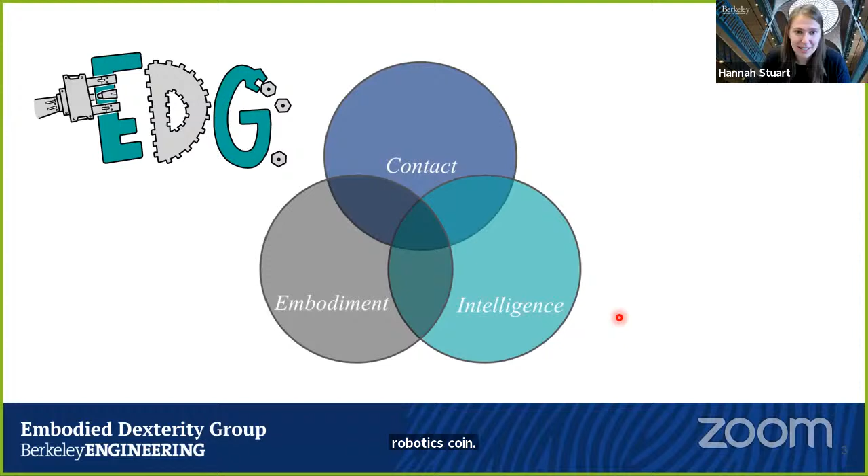Now, as you heard, I did my training with Professor Mark Cutkosky, and this is one of my favorite quotes that just really encapsulates the importance of this intersection: like the performance of a sports car, which is ultimately limited by the tires on its wheels, the performance of a robotic hand is limited by the skin on its fingers. This is just such an important element, and as you can see here, my expertise is in the design and understanding of robotic hands.

And so here we're going to add a little bit more resolution in this space. When I'm thinking about designing and prototyping systems for field deployment, a lot of times there's real utility in adding compliant elements, maybe under actuation. And that's going to also be a common theme that comes up.

Well, one element of the design of compliant hands is the compliance itself, or the kinematics of how it's going to interact with objects. On the left-hand side, you're going to see two identical hands, except that the compliance of the different joints is mixed up.

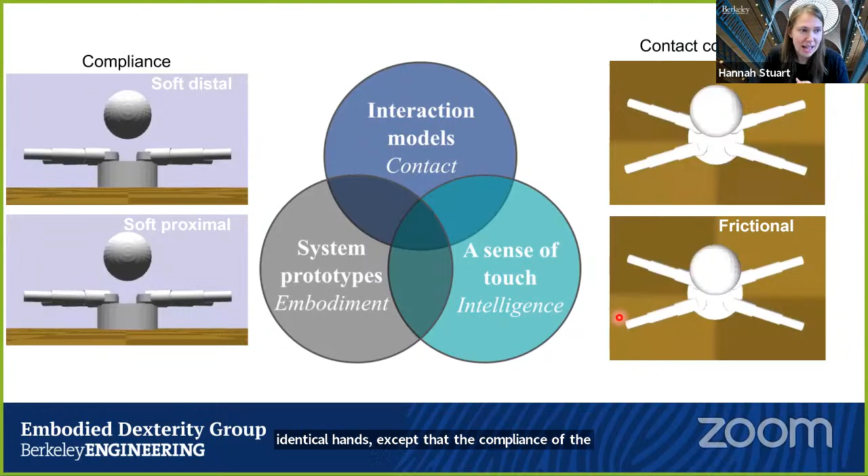This is a really mature field of studying how we design these compliant and under-actuated systems to get different motion behaviors and different forces as we interact with different objects. That's a relatively rich field already.

As I move forward, I'm actually much more interested in how our contact conditions are going to influence our behavior. In this toy problem, we have identical hands, but this time with different friction coefficients with that object. Very small changes in contact conditions, nothing geometric here, purely frictional, and this can make the difference between success and failure. So that really motivates the basis of our work.

I like to think of this not only as a challenge, but a great opportunity. A lot of times what we're trying to do in the lab is flip this around and say, if we have mechanisms that change our contact conditions just a little bit, we could have a really big impact on our overall behavior. So I see this as a cool design challenge as well.

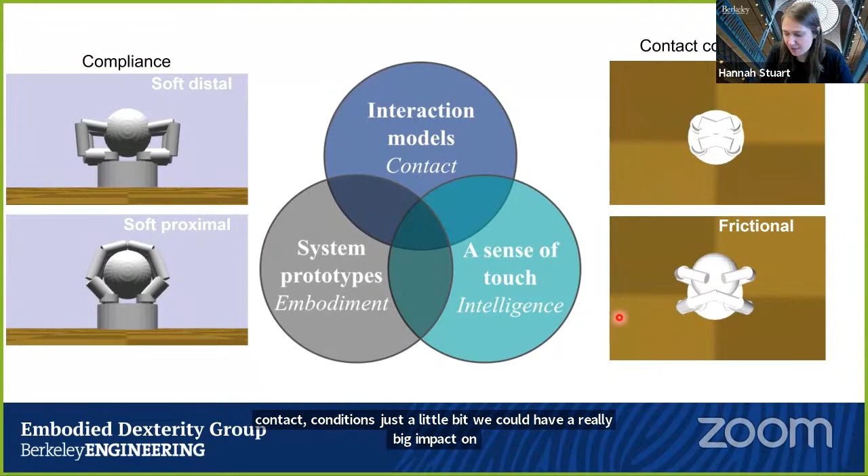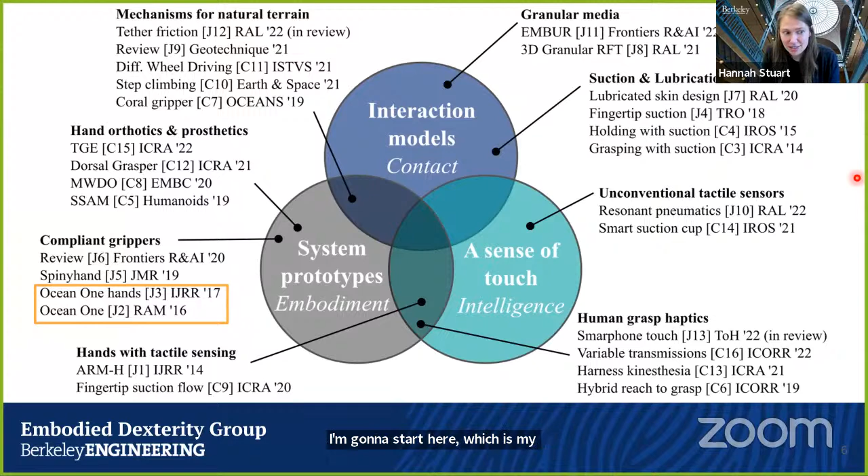I'm only going to be able to focus on a small subset of work, and here's a diagram showing the different applications we're working on. I'm going to start with my thesis work on the design of the hands for Ocean One, the deep sea diving robot, which motivates us to think about what contact conditions look like underwater—lubrication, or how we manipulate contact condition with suction. Then we'll think about how we might harness these ideas to sense our contact conditions through tactile sensors, still using ideas of flow and suction. Then we'll take a break from underwater environments, since not everybody works on underwater robots, and think about terrains in air, like granular media and other terrains on land.

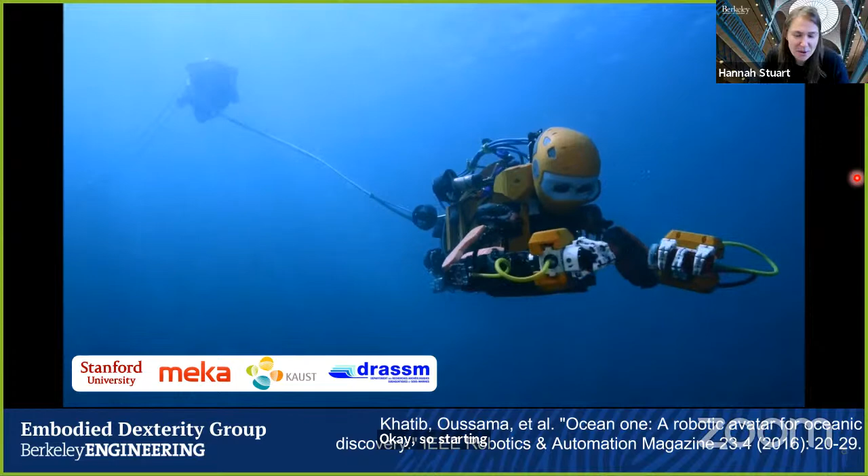Starting out, here is Ocean One, coming down at the ocean, where we actually got to take this to the Mediterranean. This was a really large team of researchers working on this, done at Stanford University, directed by Professor Oussama Khatib.

My job was to build those hands. So the part after the orange, at the very end, that's the part I designed and built. The really cool thing is we were able to go to the Mediterranean and actually go down to a shipwreck to test this on a more realistic archaeological application.

Here you can see them teleoperating it, and we were able to actually grab a vase. This was a shipwreck from 1664, I believe, so it had been a very long time since it had been touched.

A lot of the work for this was to essentially ensure the hands would not fail during operation. I remember early on in the project, Oussama said, you're building the hands—if the hands break, we can't grab anything, we're going to be very limited in the manipulation we can do. So resilience was really critical, and that became a central theme in my thesis.

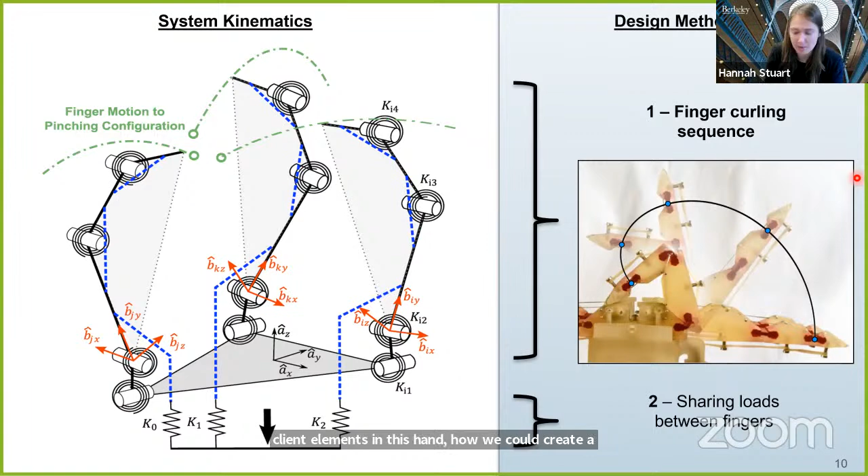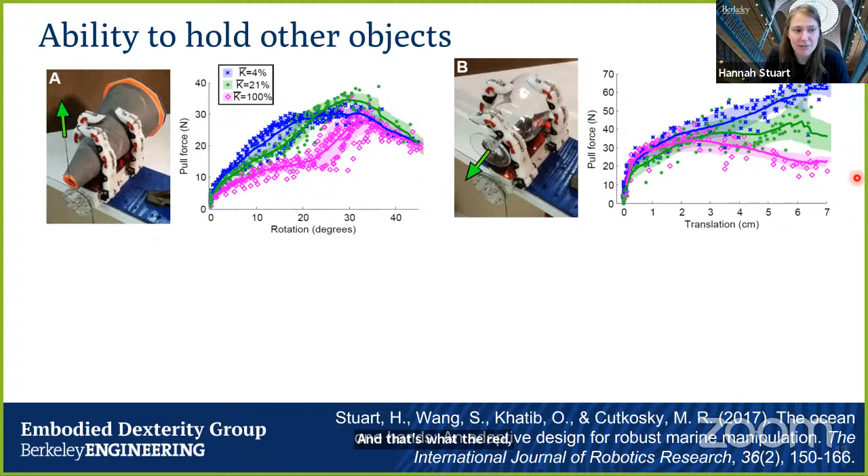I focused a lot of effort on the compliant elements in this hand, how we could create a very simple gripper, a one-actuator gripper that could do a variety of different behaviors. I won't spend much time on this because I want to get to the contact conditions, but the main punchline is that we can essentially change the different compliant elements—shown here in blue, pink, and green—with different benefits. You essentially want to dramatically change the stiffness of your device using clever spring mechanisms loaded in different ways.

If you're interested in the compliance, contact, and kinematics of this, please check out the paper. We've actually published an open source version of this hand design, and I highly recommend it if you're interested in prototyping—it's pretty easy to make and relatively inexpensive for a robot hand.

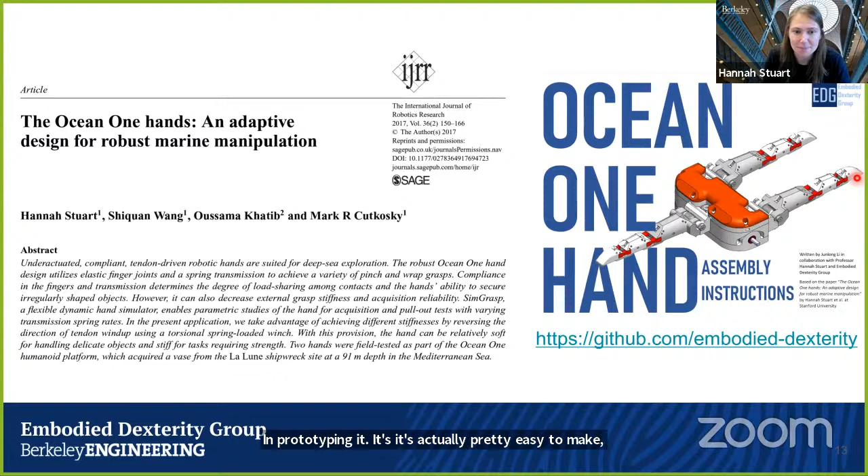But resilience and waterproofing is not the only impact of being underwater. Even the robot arms we used were based on a design for operation in air that had been modified, waterproofed, and filled with oil in order to work underwater.

One of the really important questions I wanted to ask as a student was, are there other impacts of being underwater? What I came upon was that you're in this denser, more viscous fluid, and you also have slippery films. These things are physically unique compared to being in air. So how should we design our system differently?

In terms of grasping, you might think, are there any underwater graspers? I'd say the jaws and mouth of a fish are an incredible grasper. You can see a larger fish pulling in its prey simply by opening its jaws and rapidly sucking in water. This is a principle that developed underwater uniquely.

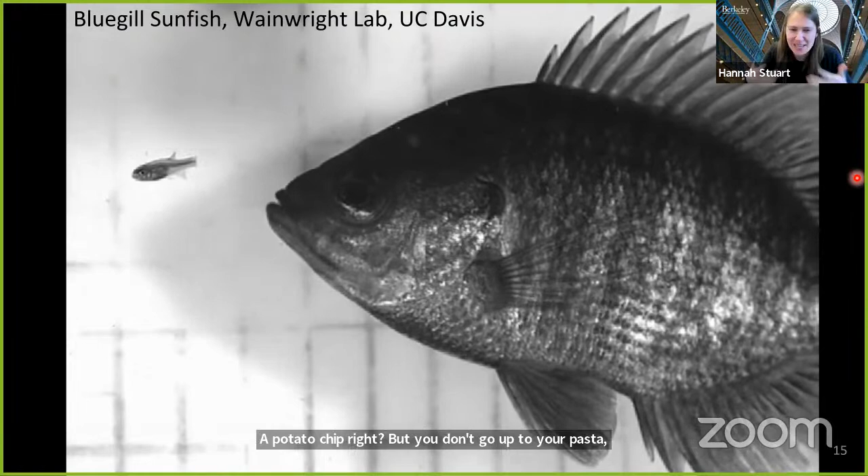I think there are a couple of animals that evolved something like this on land, like an elephant that has huge lungs and might be able to suck in a potato chip. But you don't go up to your pasta and just suck and hope it goes into your mouth—you use a fork, you use physical contact. So suction flow feeding is ubiquitous underwater, and it makes so much sense.

So why don't we add this to a robot hand? We went ahead and did this. You can see loops of tubing off to the left—it's not integrated very elegantly, but this was an early concept. The scale of forces is on the order of a little more than 1 Newton for the pumps we selected, and these are small pumps. The distance at which you start to feel those forces is on the order of a couple millimeters. So this is really, really small.

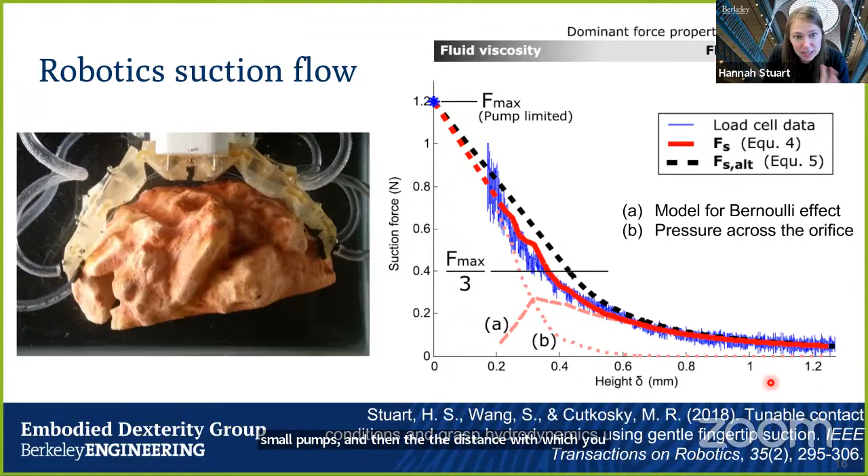Here's the effect, similar to that fish sucking in its prey. This is actually the first take—I just tossed in a little Lego block and it went straight to the fingertips. This is a much easier task to perform than trying to fish around with your fingers and grab it. So the question is, what about bigger or more massive objects?

What are the limits to this, and how much suction flow do you need? This comes down to concepts of water drag and inertia. Here's a larger object, an order of magnitude more massive. You can see that without suction, we have no hope of grasping it, but with suction, we do.

We want to understand how variable this is and how much impact it has. Here's the overall setup of the robot hand on the bottom facing upward, and the yellow star is that video I just showed you. This shows the region in which we can successfully grasp an object. The purpose of this grasp region analysis is to say: if I'm floating around, how off can I be? How accurate does my arm need to be to secure a grasp?

The dots are the experiments and the lines are simulations. You can see that when we go from no suction to with suction, we get about a 30-some percent increase in our grasp region. And it's most helpful when an object is right near the boundary of whether we can grasp it or not.

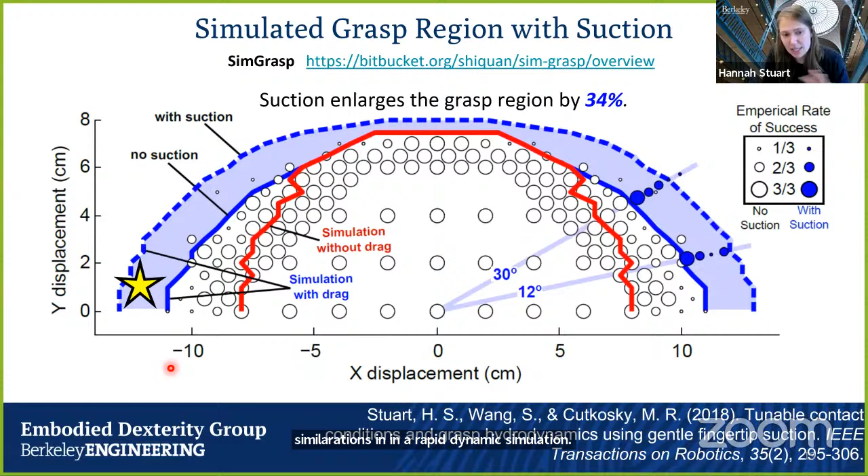Now this is a really useful tool to be able to run these simulations in a rapid dynamic simulation. We use the package SimGrasp, using a simplified model for suction force. The great thing about validating the utility of this is now we can vary the task. It was quite labor intensive to collect that initial set of data.

We can also look at, across object mass, how much suction do we need? What pumps do we need? And get the most utility from changing or improving our suction in this middle mass region. So that concludes the idea of adding suction to manipulate our contact conditions for this dynamic grasping of a floating object.

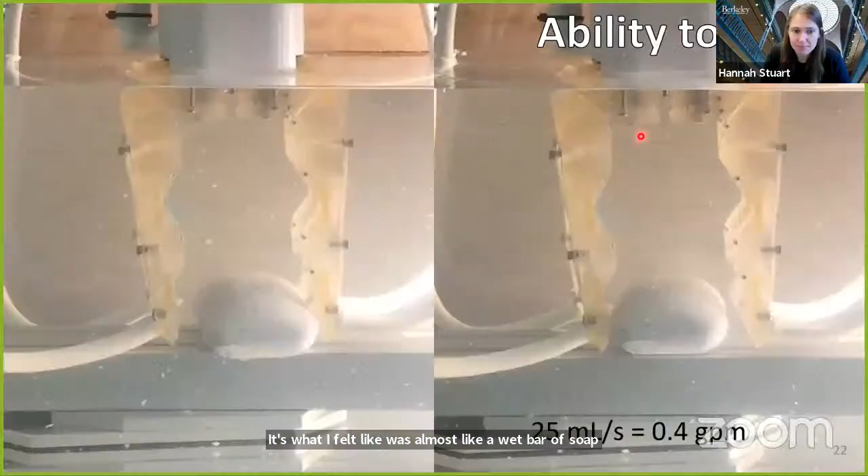But the object that we acquired from the shipwreck was extremely slippery. It felt almost like a wet bar of soap. It was covered in this thick biofilm. And so we wanted to be able to test this on slippery objects as well. So here's a bar of soap.

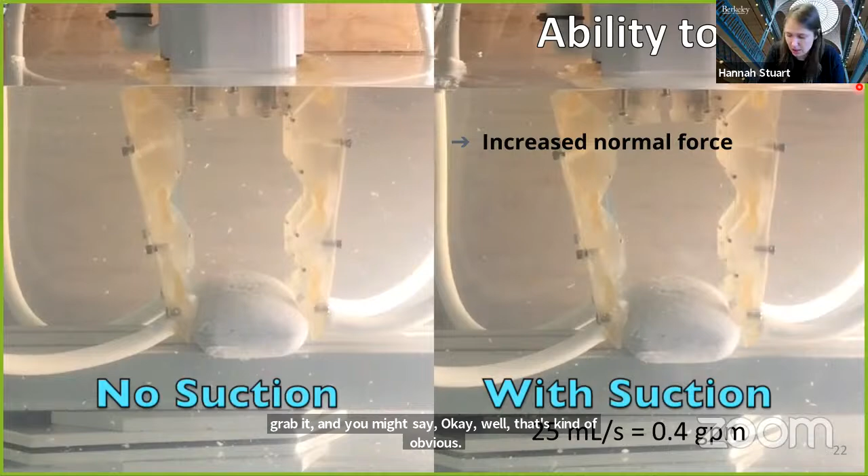And with suction, we can grab it. You might say, okay, that's kind of obvious, you're increasing your normal force by sucking or pulling on this surface. But in fact, we're not getting a seal, and we found that we're also getting an increase in our coefficient of friction, especially on rough surfaces.

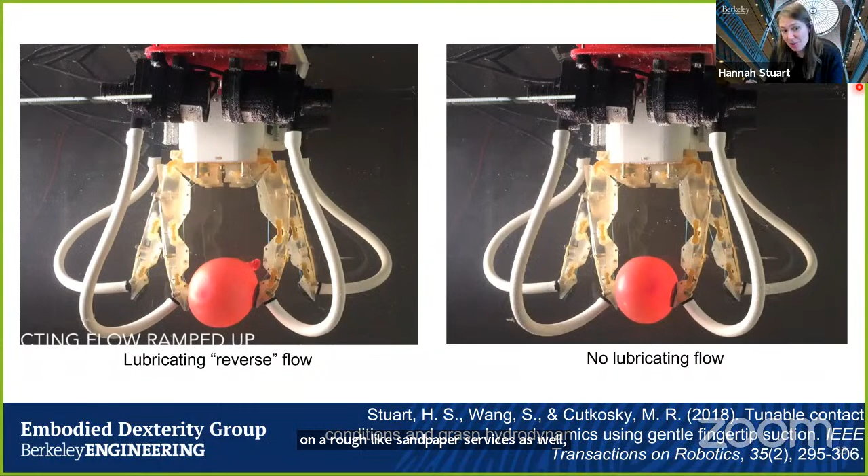So you're essentially pulling the water through that interface, and that gives you a nice suction feel on rough, sandpaper surfaces as well. Then we can reduce our friction by pumping water in the opposite direction. This gives us a range of very interesting push and pull right at the fingertip underwater.

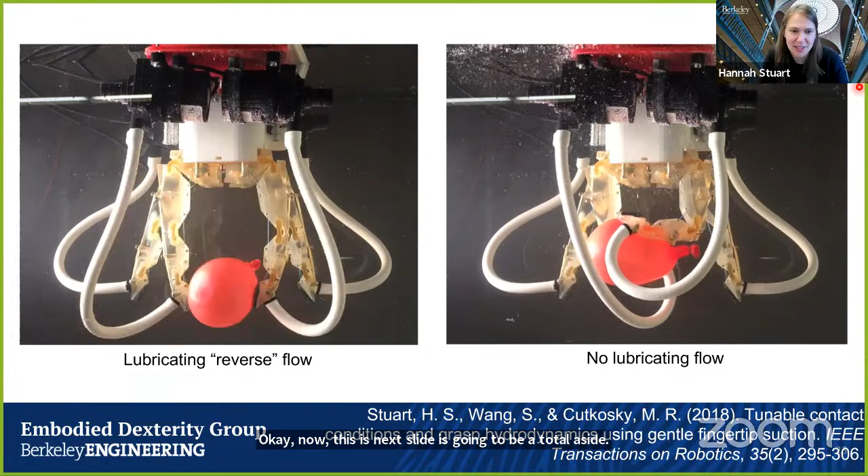Now this next slide is going to be a total aside, but I know there are folks at Toronto interested in underwater systems. This work is under review and in preparation, but I wanted to mention that we are now interested in how smaller scale systems can do manipulation. So thinking about that fish again, what kind of jaw allows you to grip onto surfaces? We're doing these studies in fish as well as in robotic systems.

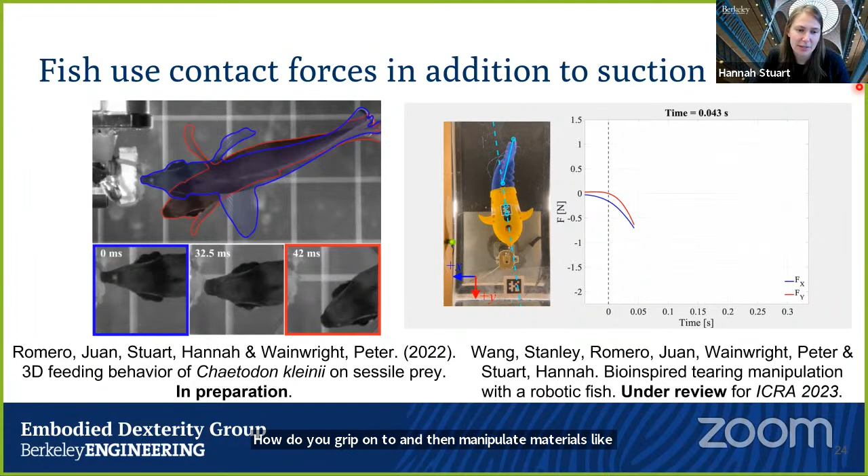How do you grip onto and then manipulate materials, like tearing something off of a substrate with a robotic fish? Okay, so that pretty much covers the compliant and contact condition elements we've been interested in for these underwater environments. Now I want to move on to some of the other elements of this second region, which is on the lubricated skin.

Some folks have said suction seems very helpful in a specific scenario, where maybe you have the ability to carry around pumps and add in this tubing, but it may not be practical in other environments. One really important one is when you're not totally submerged, going in and out from a wet scenario, the pumping becomes much more complicated as you start pulling in both water and air.

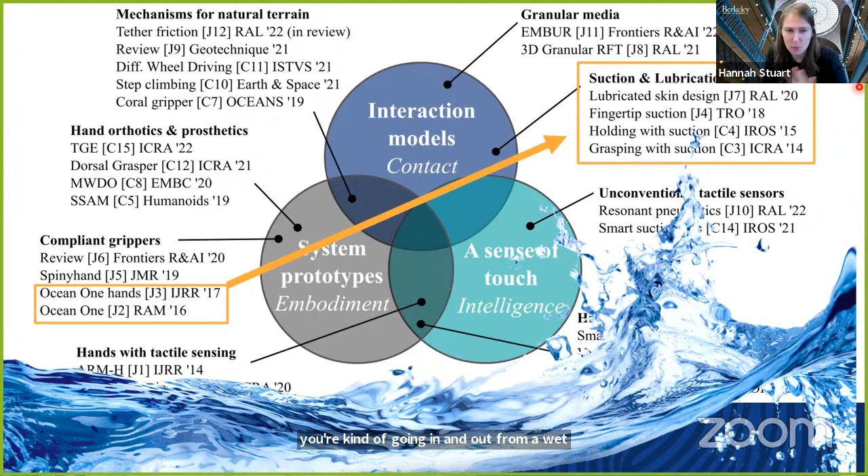If we can move away from an active system to a more passive system, I think this could be broadly adoptable. So here we're backing up and asking, what's the simplest technology we could think of? Well, it's a rubber skin. The vast majority of robot hands have some sort of rubbery frictional skin surface, but what is the geometry of that skin? When humans interact with objects underwater for a long time, our fingers get wrinkly.

Now, I would say this is still out for debate. Some people have found evidence that the wrinkles have some mechanical advantage, some sort of frictional element, but others have found the opposite, that actually the wrinkles can reduce friction. So from the biological perspective, I would say it's not yet concluded.

But what we can do is answer this from the robot side by parametrically studying different skin geometries. So that's what we did. You can see here that we tested a number of features, keeping the nominal contact area the same, but moving from one feature to three features to many, many features, testing each one individually.

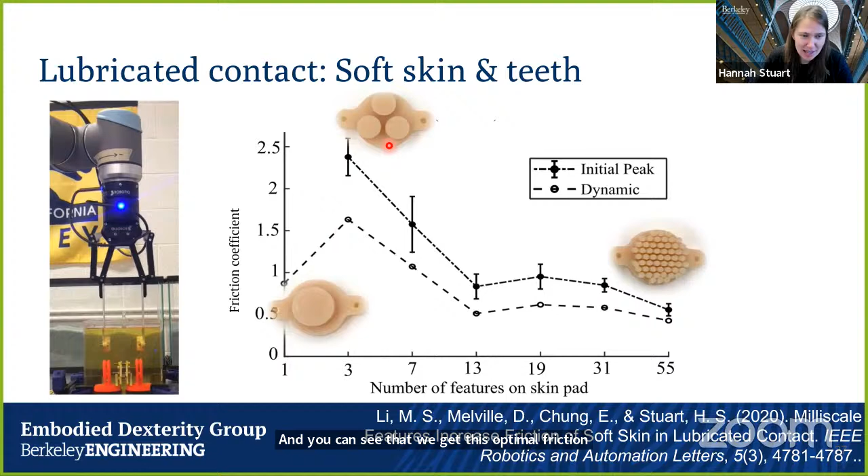Here we're increasing the lubrication by testing an oil and then vertically pulling upward and measuring the friction coefficient. You can see the dynamic friction coefficient and the initial peak. We didn't report initial peak for one feature because it's so slippery that we don't even measure one. And you can see that we get this optimal friction property at 3 contacts. Okay, what's going on there?

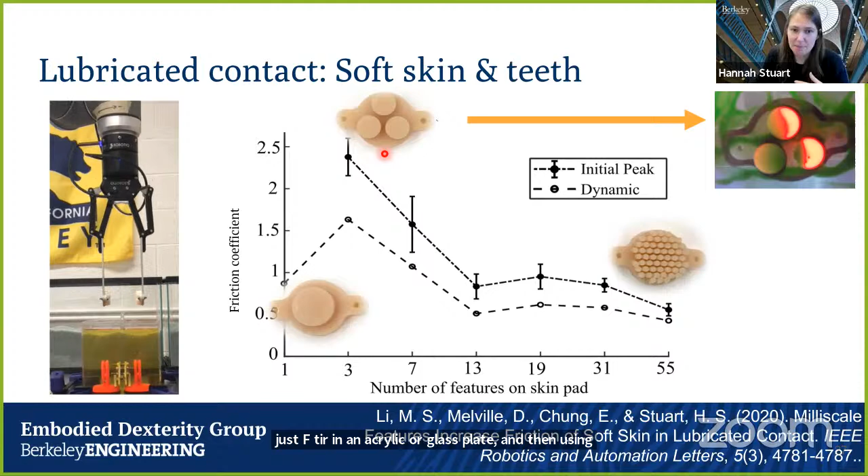So to really understand how this lubricating film is affecting contact, we came up with a new way to visualize it, which is essentially FTIR in an acrylic or glass plate, using a dyed oil on top, which allows you to visualize not only the contact region, but also the thickness of the film. This is how it operates. The important part about using this oil rather than water, which wouldn't work, is that it has a very similar index of refraction to the material it's sitting on.

And so you can see here that as we visualize dry contact, 1 versus 3 features, they're very, very similar. In fact, 1 feature is going to be stickier. It's going to be better. It's going to be a little bit more catastrophic when it starts to slip.

But 1 is typically better. Then when we go into this wet circumstance, 1 is basically slipping off on its own, but then 3 is giving us that nice stick-slip behavior that we would expect in dry conditions.

Okay, so that's as far as we took it. I think when we're thinking of underwater environments, especially in the field, there's maybe a combination of spines. Spines are a very common area of research, and we've also been interested in this for very rocky surfaces. I think this is a growing and interesting area of research for us. I will say this is work that we did before the pandemic and got put on hold during the pandemic, but I'm hoping we can continue it as we move forward.

Okay, so we've gone pretty deep into compliance and contact conditions for underwater multi-finger hands. So the next thing I want to do is to bring in the sense of touch, and then we're going to go out of the water. Okay, so sense of touch.

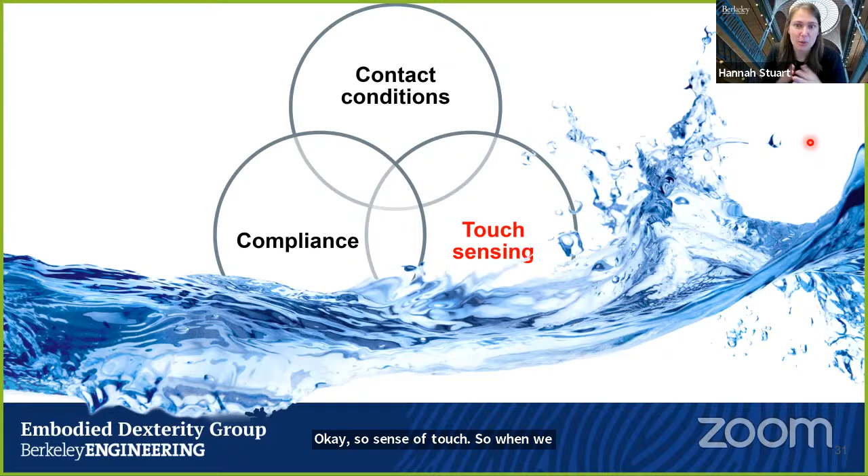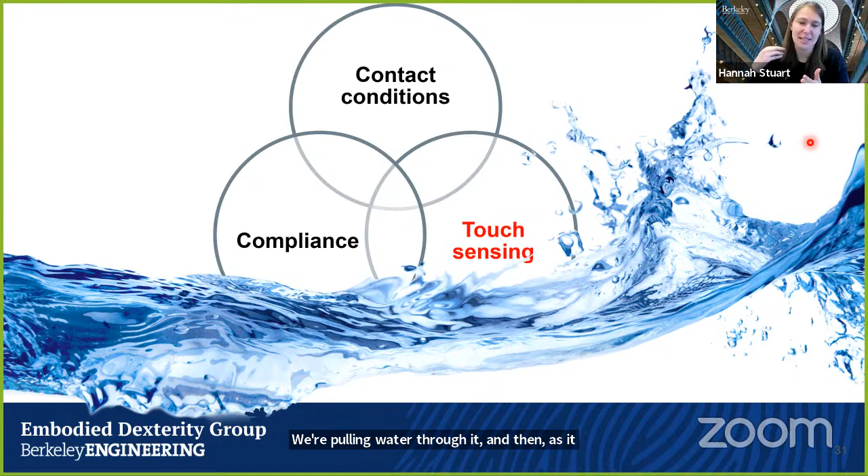So when we think of some of the systems that I've just shown you, suction flow is one of them. And what are we doing with suction flow? We have a pump, we're pulling water through it, and as it gets clogged and unclogged, that flow rate is going to change. You can actually measure flow rate with a differential pressure transducer that's going to be insensitive to ambient pressure, which changes with depth.

So that leads us to, well, let's monitor this and see how our contact is changing. So what I'm going to show you here is a video on the left-hand side of this fingertip interacting with this flat, smooth surface. Here you can see a measure of flow. This is our differential pressure transducer. We're going to look at that as our angle with the surface, theta, is changing.

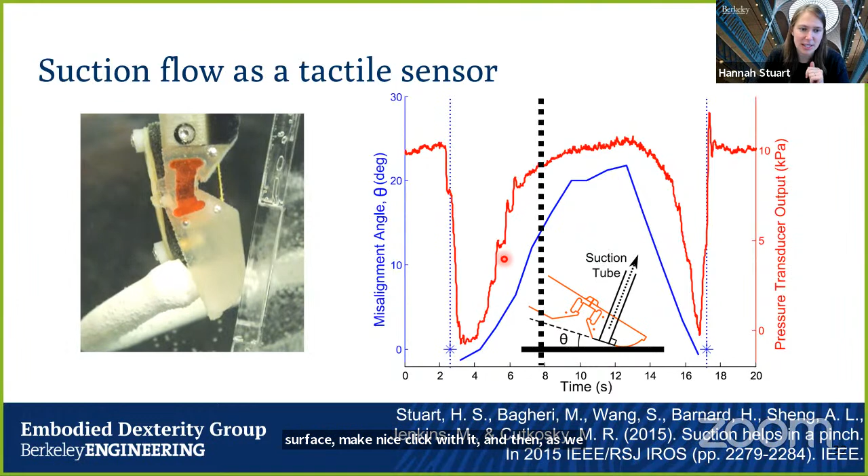So here we're going to come into the surface, make nice contact with it. And then as we stick and slip up the surface, we see these peaks. We saturate the signal at some angle, and then it's going to come down and pop off the surface. You can see that the pressure transducer actually amplified that dynamic event with this spike.

Okay, so now I wanted to show this. So Philip Nadeau, who is a PhD student at Toronto, led this summer project, looking at how we can now use this signal in a more realistic grasping task. And so here we're trying to do the manipulation of pipes underwater, which could be an interesting industrial task.

And you can see on the left-hand side, this is just a palpation. So we're trying to figure out if we can detect the stiffness of an object through haptic exploration. And the right-hand side is the pipe experiment, where we're actually using the sensor signal first in feedback control to pose the finger relative to the object, so control the grasp, and then monitor the forces and the interaction between the hand and the pipe as it gets pulled out of the hand.

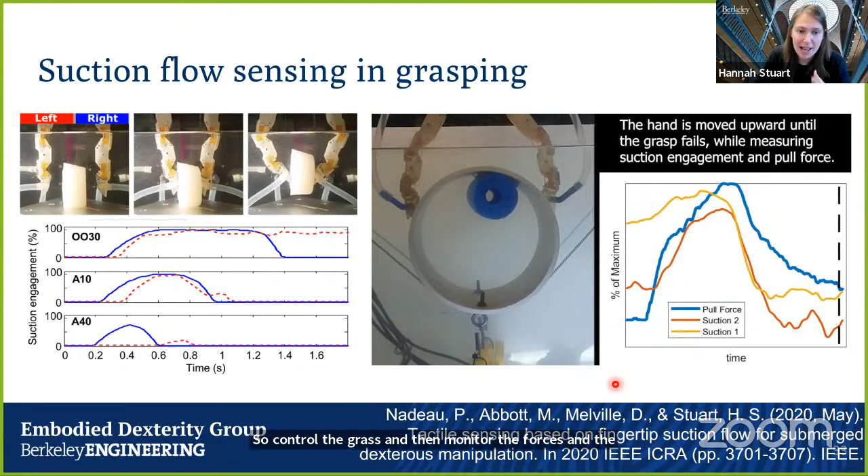So I'm coming to the end of this section now, but why is it that we might want to add suction tactile sensing? I think there's a couple advantages for when we design a system that is interacting physically with the environment, but is being actuated from a distance. And this is going to be a theme that kind of emerges, I think, out of the fact that we're building systems for field operation.

So here you can see that the pump could be located anywhere on the robot, and the piping is going down along the arm. If you do this, then the flow sensors could be located far away from the hand. Now, hands are exposed to the world, they are extended from the body, and their job is inherently to impact the world, right? And so sensitive electronics often get challenged in a way that for field operation, they often get omitted altogether, right? And so you're kind of just relying on the passive system.

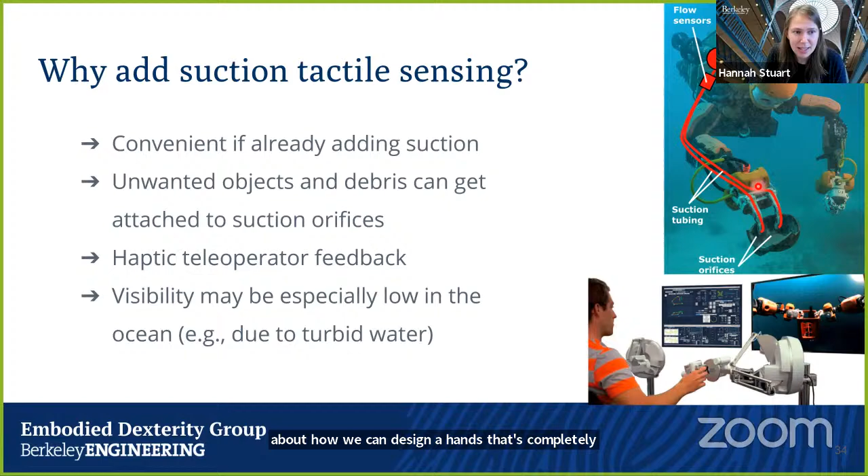So I think one middle ground is to design a hand that's completely passive but can be sensed from far away. We've finished up with our work underwater, so now we want to move back to this overall vision where we have a more complex environment that also includes air. So the next step is to question whether these ideas around suction flow have any utility in air. I motivated suction flow underwater by saying fish do it, but is there some scale at which it makes sense in air as well?

The technology that already uses suction in air is the classic suction cup, which is universal especially in industrial settings for pick and place. Typically people assume this is a binary system, either sucked onto a surface successfully, or it breaks seal and air is flowing like crazy. People have monitored flow rate before, but it's treated as that binary signal. What we want to do is create an analog signal out of this physical interaction that's more useful, similar to the underwater work.

So what we're going to do is create internal chambers, four little chambers inside, each with a penetration. No flow is actually going through this, but it allows a remote pressure sensor to monitor the wall pressure of each chamber, giving us an understanding of flow rate. We're estimating the differential flow rate between these four chambers, and flow is pulled up and out a single vacuum line.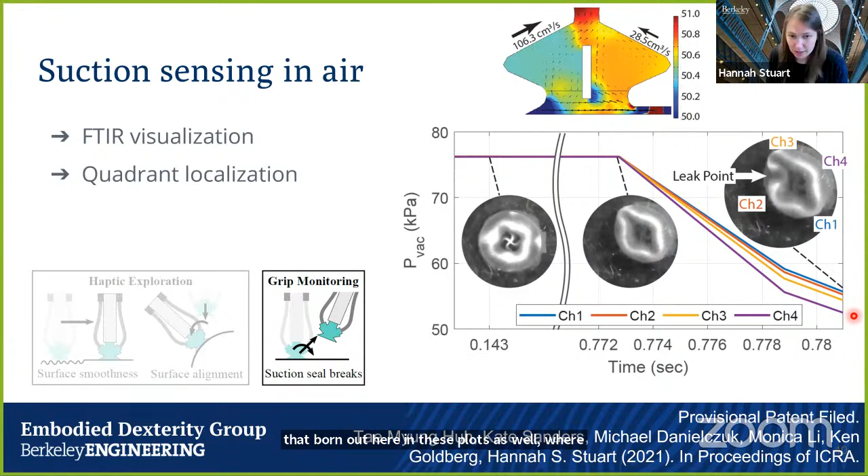So this isn't necessarily a simple physical system, but it is an informative one. You can see that borne out in these plots as well, where chamber 4 shows the biggest drop in pressure.

The other idea is to consider how we might explore a surface, especially a textured one, to find the smoothest location best for suction gripping. You could visualize a surface but not detect these things easily, especially one that's both clear and textured.

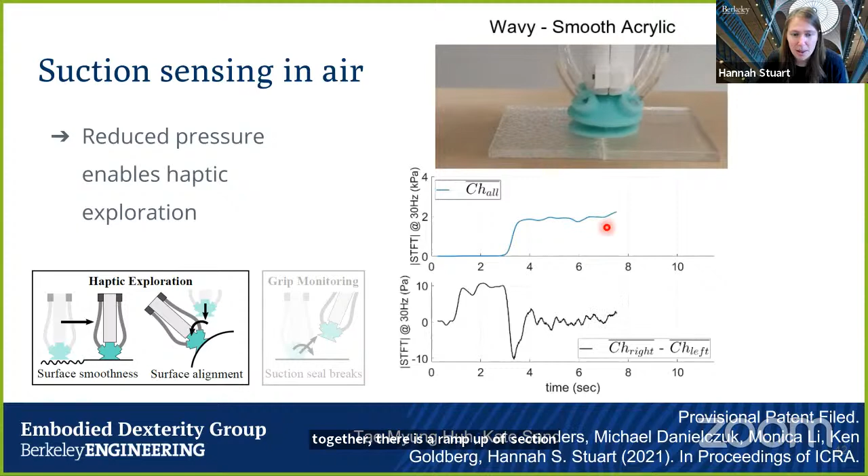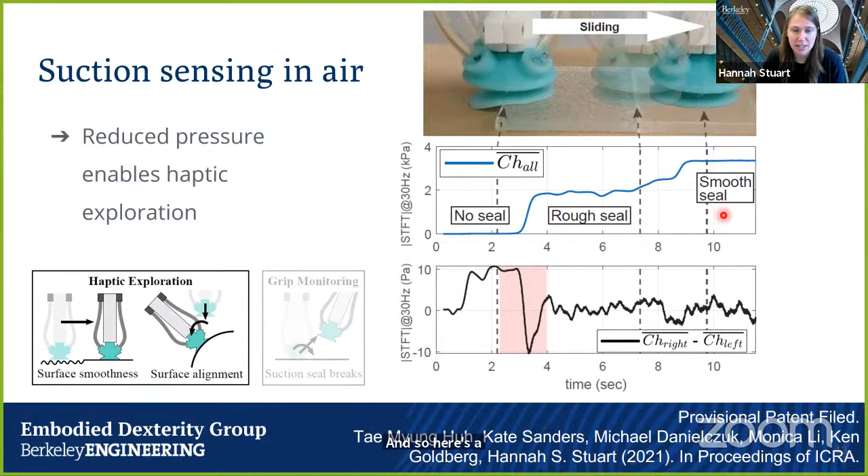Here you can see the suction cup, and we're reducing the pressure with which we're pulling, allowing us to do this gentle sliding rather than just getting stuck. If we look at all of them together, there's a ramp up of suction engagement for the bumpy middle section, but it doesn't fully increase until we get onto the smooth section. Here's a close-up where we have no seal, the rough seal, and then the smooth seal, giving us an interesting resolution of the surface.

Going forward with this project, we're exploring different interaction or haptic exploration procedures to get different types of information. This PCB, which is bumpy and has holes and vias, probably wouldn't commonly be gripped by a suction cup unless you had a really good model of the object. But let's say this is recycling, so you don't have a good model for the object.

You could actually explore the surface and come up with a simple heuristic search algorithm to find the best point to grasp. So here it's just doing a blind search, and when it gets close to a graspable location, it uses the signal to define its next grasp location. We're actually looking for the secondary flow channel, and it works fairly consistently on this object. Okay, so that's a whirlwind overview of all the projects.

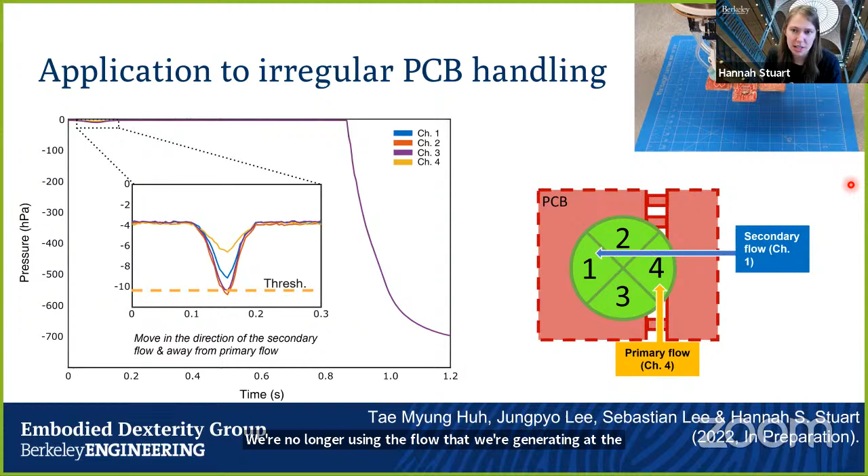I want to shift gears again to another flow-based sensor. This one is a pretty big shift in that we're no longer using the flow generated at the contact interface for our information. We're still adding flow to the system and getting a tactile signal, but it's now not at the interaction contact point itself.

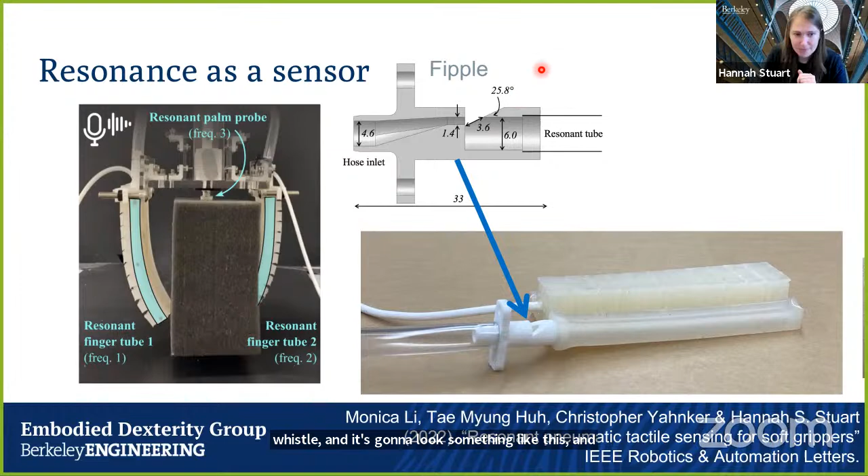We've explored the idea of pumping air in and using whistles. Here you can see this is what's called a fipple, kind of what you'd get on a slide whistle. Air comes out here and resonates across this sharp edge, and then we have a resonant tube after it. So we've got this nice long resonant tube, and together they make an audible sound.

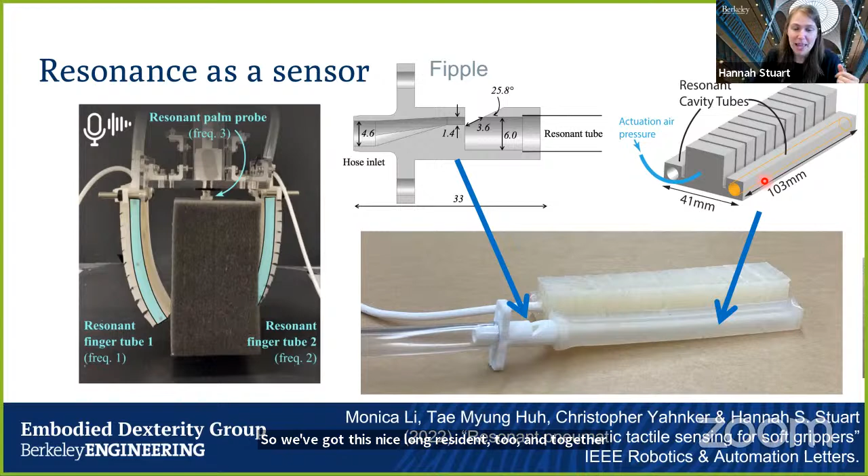In this particular hand prototype, we've got 3 different frequencies because we're starting with 3 different base tube lengths, different modalities. One is a resonant tube here. The other is a resonant tube on the other side, but this one has a hole poked in it, kind of like a whistle or a recorder. And up here we have just a linear probe.

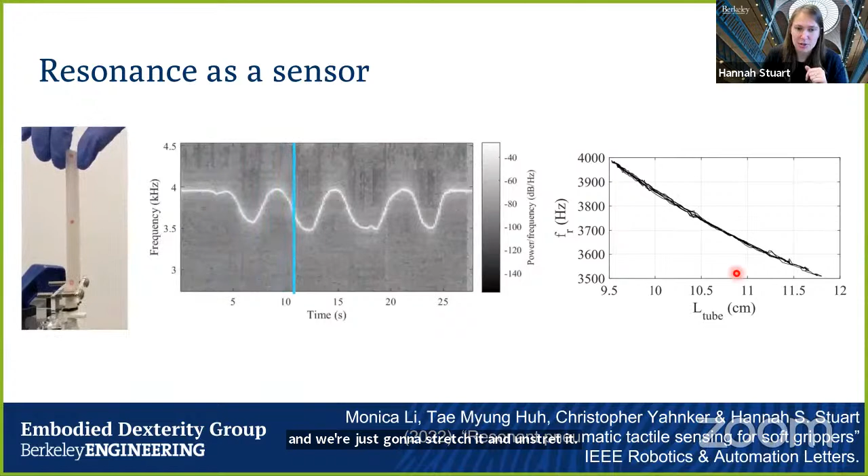The way this works: here we have a tube, and we're just going to stretch it and unstretch it, and you can see the frequency changes. This is fairly linear across the tube length tested. We can also assume the tube deforms as the finger curls, so we can get an idea of the curvature of the soft finger just by listening to it. And that recorder idea, if you punch a hole, you can get a proximity sensor as well, where as we get closer, it changes its frequency.

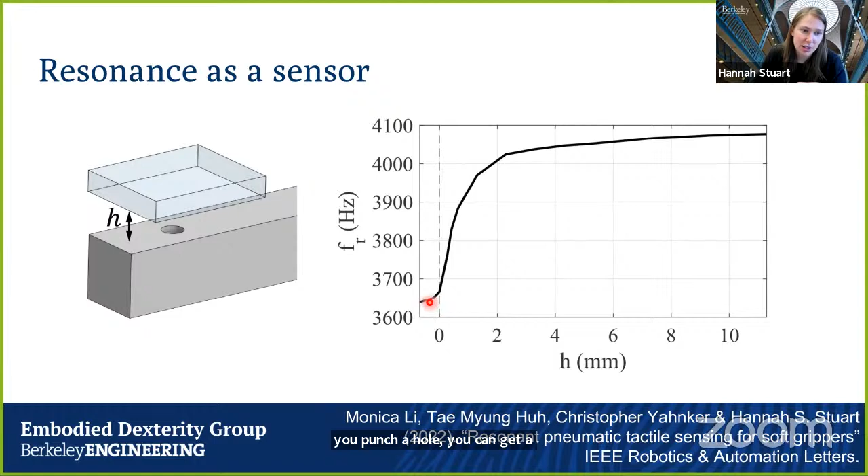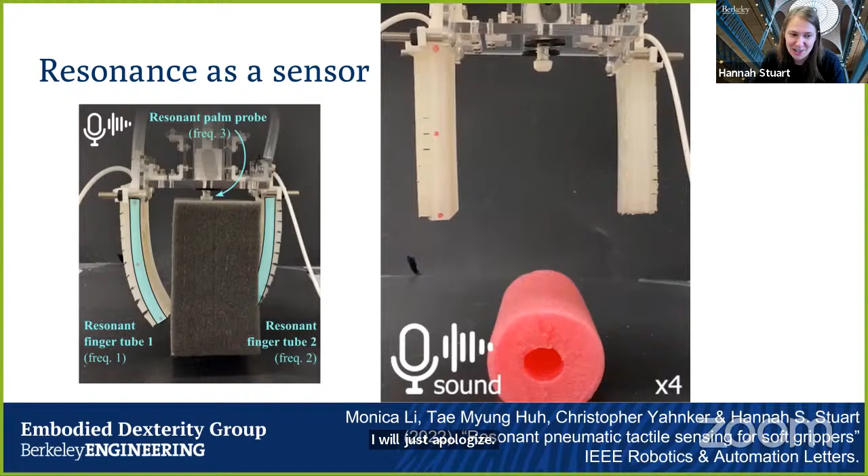Okay, now I'm going to play you the sound. I'll apologize now because it's very loud and I don't know how it's translating on your end. Let's go ahead and listen. Oh, the video, here we are. Hopefully you can hear it — you can hear that frequency going up and down as we go.

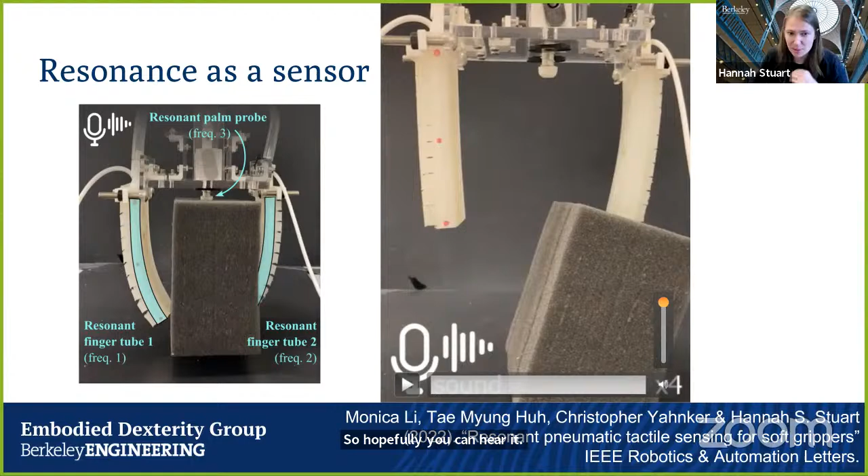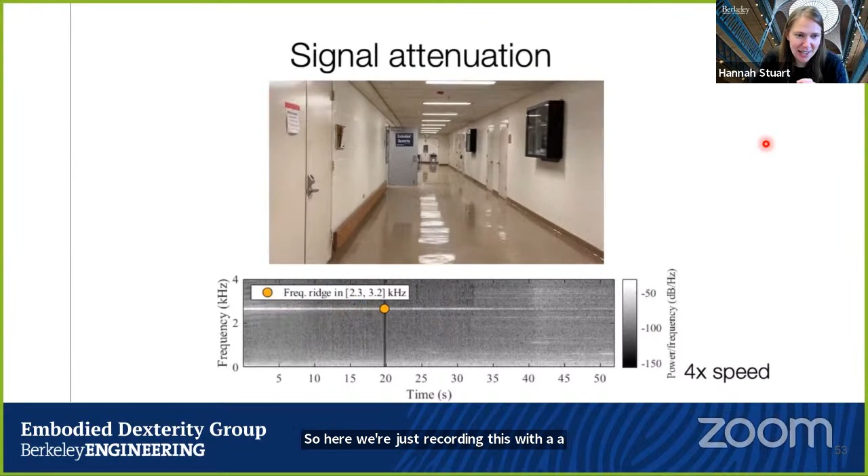On the next slide you're also going to hear another loud sound potentially. This is to show, almost comically, how loud you can make these things. Here we're just recording this with a phone. You see we walk all the way down the hall, then down the next hall, and you can keep detecting that signal fairly well until you get far away.

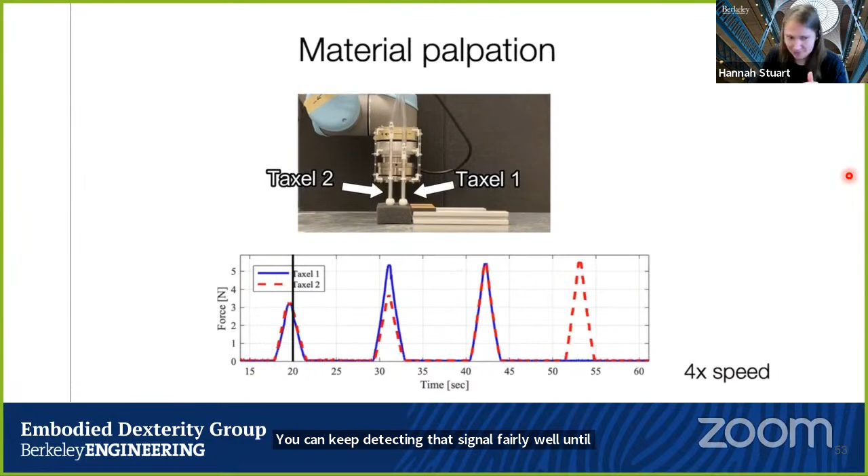Okay, so I think that's a fun exploration. I think the next logical steps are to try to make it not quite so loud for humans, or maybe it's only something currently suitable in remote environments with an atmosphere. But yeah, I think there's a lot of potential there, and hopefully some new work on that comes out soon.

Okay, so we've gone into a lot of flow-based technologies. I wanted to shift paces now and look at one of our newer thrusts in the lab, which is trying to understand physical interaction with the ground, with granular media.

Now, this is kind of interesting because there are times when it can flow, kind of like a fluid, but it also has more complex physics in that it can also not. It can jam and do very interesting things, even more so than you might get with a liquid.

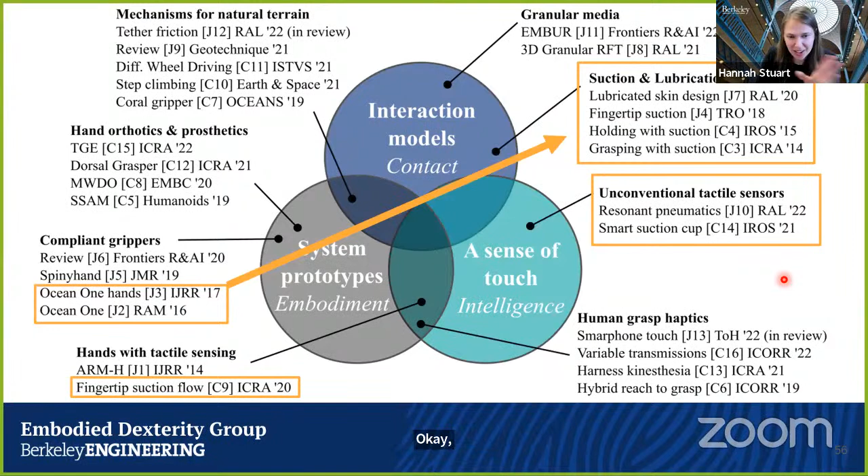So here we went across and did our unconventional tactile sensors, and now we're going to get into natural terrain and granular media.

The themes we had previously were really around how do we forcefully manipulate objects. When I'm thinking about ground applications, one thing I would love to do is rethink this idea of construction with very large machines. This really makes the most sense.

When I think about this large excavator, whatever is at its treads is going to be crushed. It might make some difference whether it's leaves or sand, but not as much as compared to a very small machine. This is an important consideration for space applications, where it costs a lot to send massive objects, and you also have a reduction in gravity.

This gets us into the work we've been doing for the NASA Early Career Grant. What we envision for very forceful construction-like tasks on something like Mars or the moon is actually to use a team of much smaller robots that can work together to still do that very forceful task. There are going to be a couple elements to this.

One is, how do we actually attach this machine to the environment? How do we increase that traction, that holding force? How do we predict what forces we can get from the system to inform control?

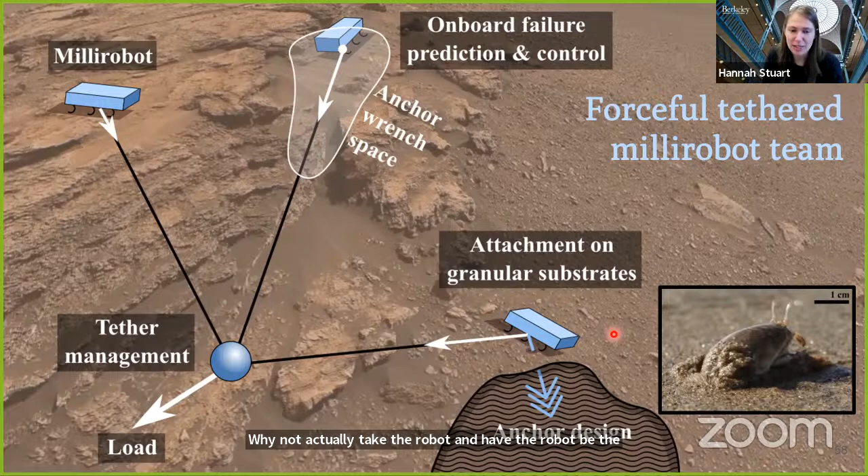One animal we were interested in when thinking about anchor designs—since it's very hard to penetrate devices and objects down into the ground—why not actually take the robot and have the robot be the anchor itself? So actually burrow the robot down and have that resist forces.

This is the Pacific mole crab, one of the better burrowers in terms of a legged device—something that might be able to locomote but also burrow down. We have the awesome luck of being at Berkeley, which has Bob Full in integrative biology, an incredible researcher, who was looking at Pacific mole crabs at the time.

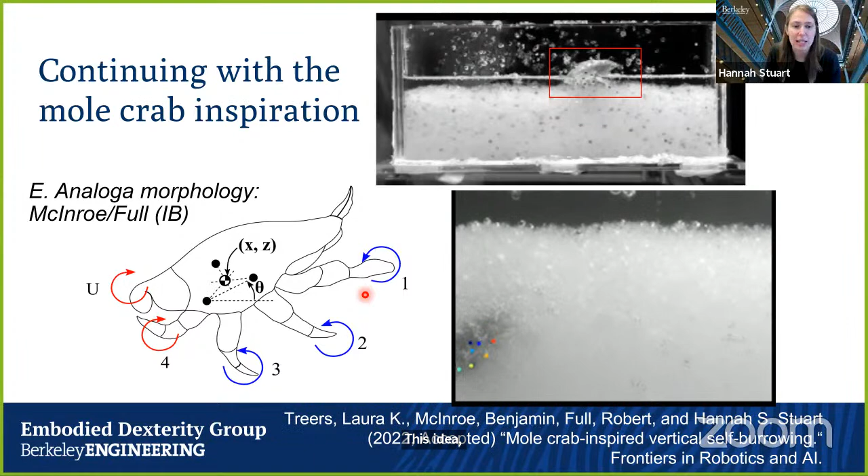One thing I want to point out for these animals: on the left-hand side we've got legs going in one direction, and the blue legs going in an opposite direction. We pose the hypothesis that these two opposite directions are really important for locomoting downward. This brings us to the robot Ember, the Emerita burrowing robot.

It's about 4 times the size scale of the real mole crab, so we're also using larger grains—plastic beads that are actually quite difficult to move through. Downward burrowing, especially with legs, is a known and very challenging task. In fact, this is going to be the very first robot able to do so with legs in the most traditional sense—a lot of prior work burrows sideways or uses specialized drilling mechanisms to burrow down.

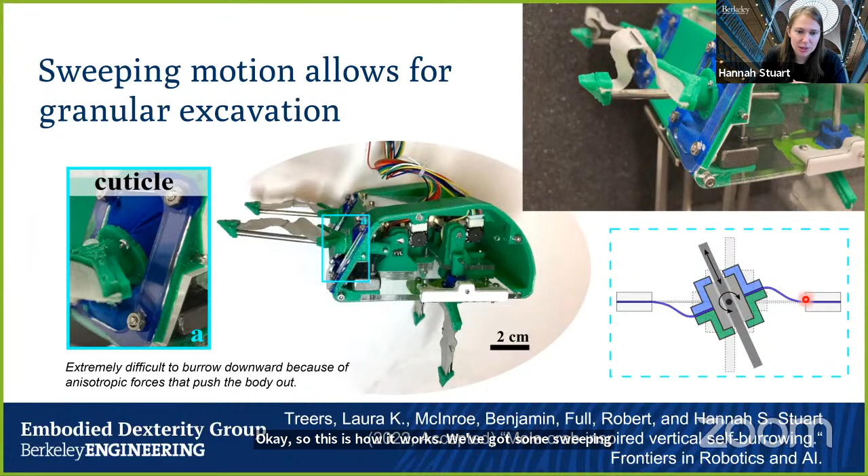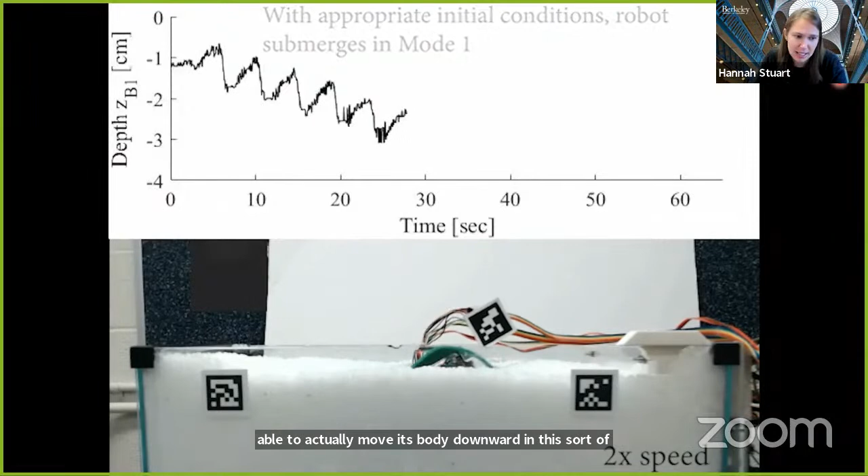So this is how it works: we've got sweeping legs with a crank mechanism, and nice rubber cuticles to keep the grains from getting into our robot. Here you see one of the burrowing events, where it's able to actually move its body downward in this cyclical fashion and almost completely submerge its entire body.

Now, how do we start to draw useful design tools? How do we start to create tools so that we can understand how this is actually working, to design other systems?

Here what we're going to do is use what's called granular resistive force theory. So what we're going to do is integrate up all the forces that we would expect to experience on all the different elements of the leg, and then add them up together. I'm going to get into granular resistive force theory a little bit later.

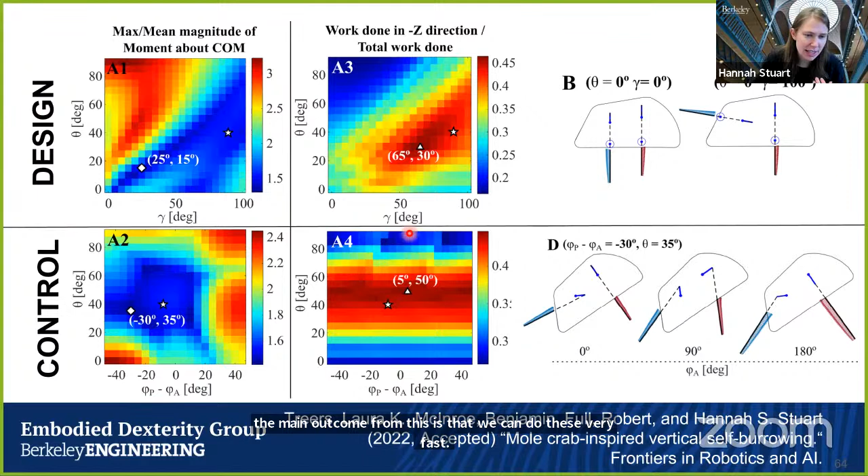So right now it's a little vague, but the main outcome from this is that we can do these very fast, large parametric studies. Now on these plots here, you're going to see there's a star, and that is the real design that we were able to get to burrow.

On the top, there is a design exploration where we're changing the angle at which it is trying to burrow down, as well as the orientation of the legs. By changing gamma, we're shifting where this blue leg up here is. And we find that it actually is better to shift it upward into this region here, which looks more like the real mole crab, which is kind of interesting.

Then there's this control study, which is around the relative phasing of the front and back leg. Do they go together, or does one lead the other? We find that there is actually a region in here which is going to be preferred. It's kind of cool that these very simplified granular interaction models are bearing out the trends we see experimentally. Okay, so that is how do we get our robot to burrow down?

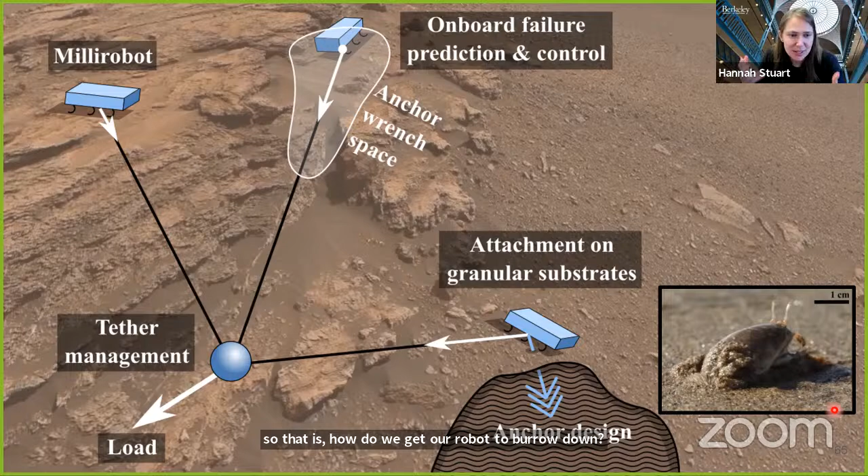Now the question is, once it's burrowed down, how much tugging force can we get from this anchor point? This is going to bring us to, now we are actually switching platforms for now. I'm hoping to close the loop with the other platform as well.

But here we've got a 4-legged kind of RHex, mini RHex like robot, and it's going to be pulling on this sled. It has a little winch right here on its back end, and that's what it's going to use. Really the work here is posing the hypothesis that we can generate limit surfaces using granular resistive force theory in a way that's useful for estimating and controlling robot behavior and informing controls.

Now, limit surface analysis has been applied to robot hands and manipulation for a very long time. It's just a very useful way to do fast simulations. But this is the first time it's getting applied to granular interactions in this way.

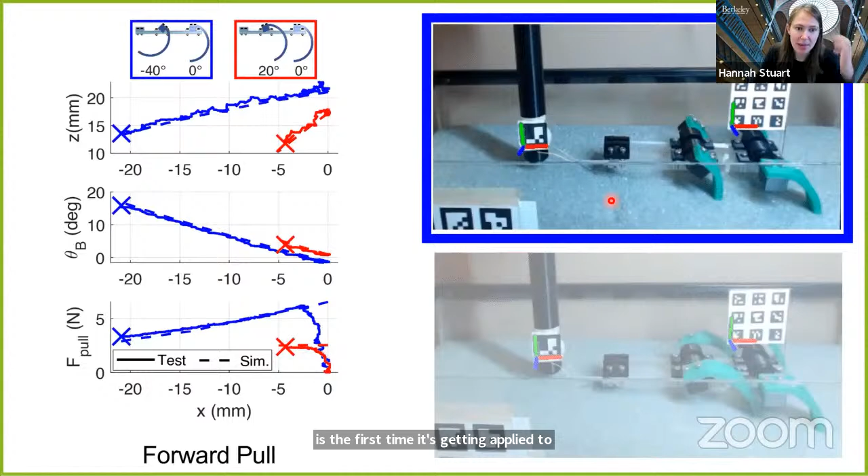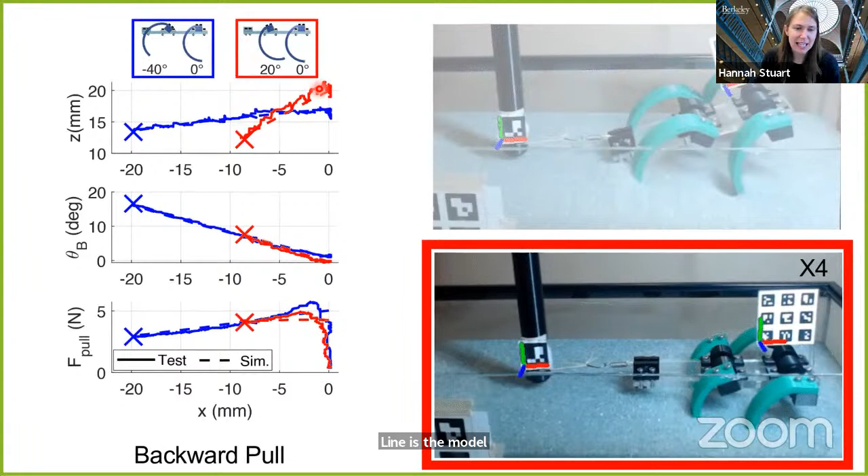Okay, so on the right-hand side, you're going to see a set of experiments where we're just pulling on this robot to see what are the forces and what are the wrenches that we're able to get from a legged robot underground. The dashed line is the model, and the squiggly line is the force measurements. So you can see that this modeling method seems to be pretty useful in this case.

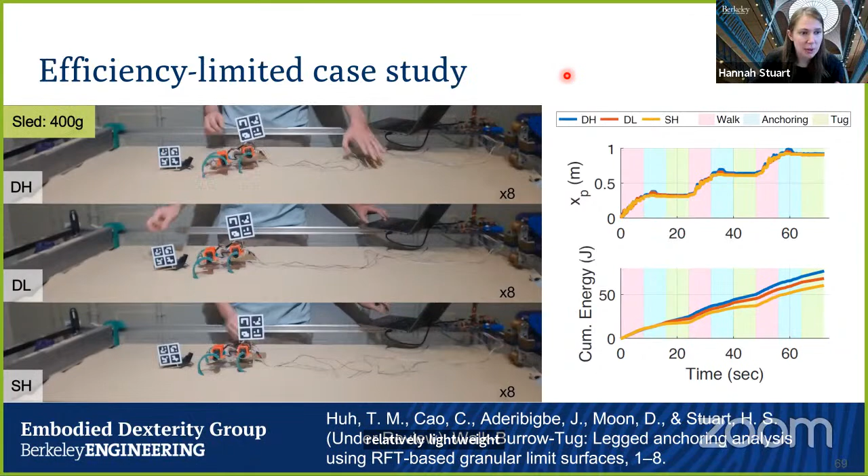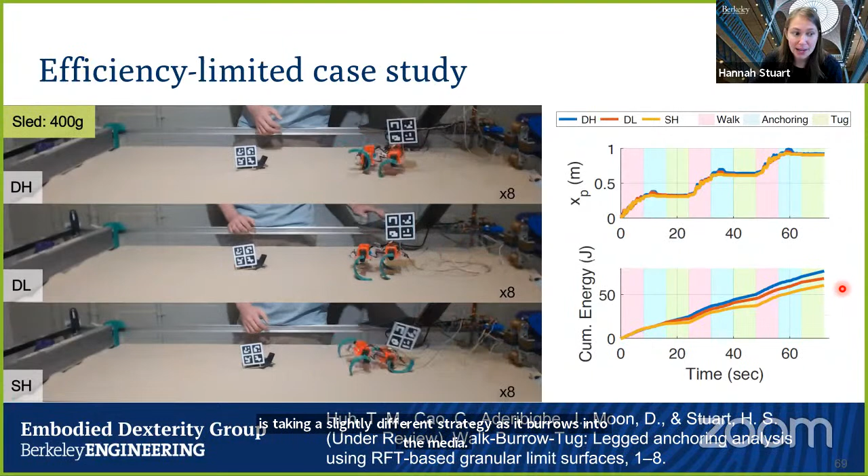And so here you can see for a 400 gram, or relatively lightweight, load, all of the strategies work fine. Each robot is taking a slightly different strategy as it burrows into the media. But you can see that the cumulative energy of the robot is going to be better for the shallow strategy.

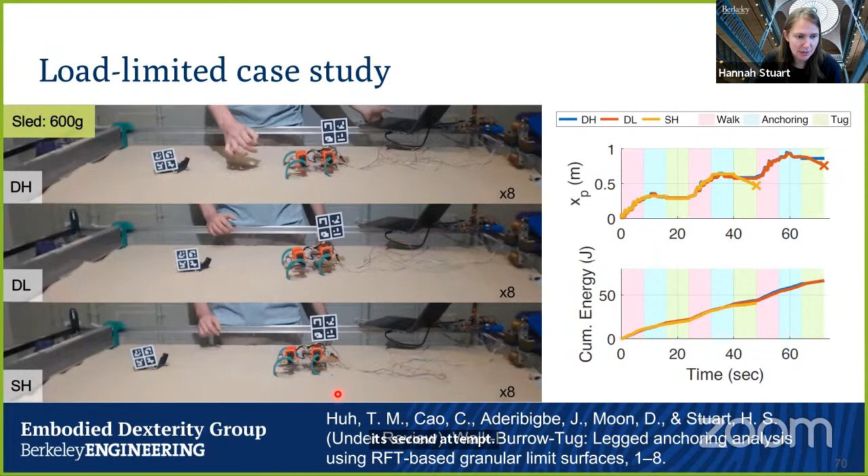Now, what if we make the sled a little heavier? So here you can see, again, the same three strategies. With the shallow case, you're going to see that it's going to actually fail on its second attempt, where it's not able to withstand the tugging forces. And then the deep low load is going to fail on this next attempt.

Flip over. And then the deep high load is the only one that can complete all three tuggings. Okay, so this is ongoing work. This is actually currently under review now, but hopefully the full analysis will come out soon for folks to review.

So the big takeaway from this section is the utility or the power of creating new modeling methods for understanding the interaction forces with granular media. Granular media is all around us.

Now, granular resistive force theory is not new at all. Our lab did not come up with this. But what it is, is a first order approximation of intrusion forces given a defined motion. It relies first on experimentally characterizing your media through penetration studies, which are time consuming. And it's computed based on velocity direction, so it does not work when velocity goes to zero. Both of these are real limiting factors for laboratories to adopt this very useful tool. Also, because of this experimental characterization limitation, most people deploy it in 2 dimensions.

So the first thing we did was come up with a new way to implement 3D granular resistive force theory using simplified approximations from a limited set of empirical characterizations. That work came out in 2021, the first 3D implementation in that way.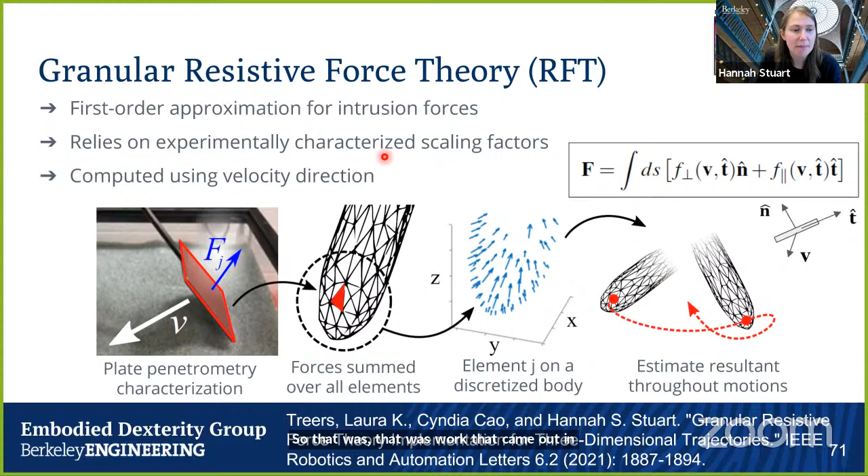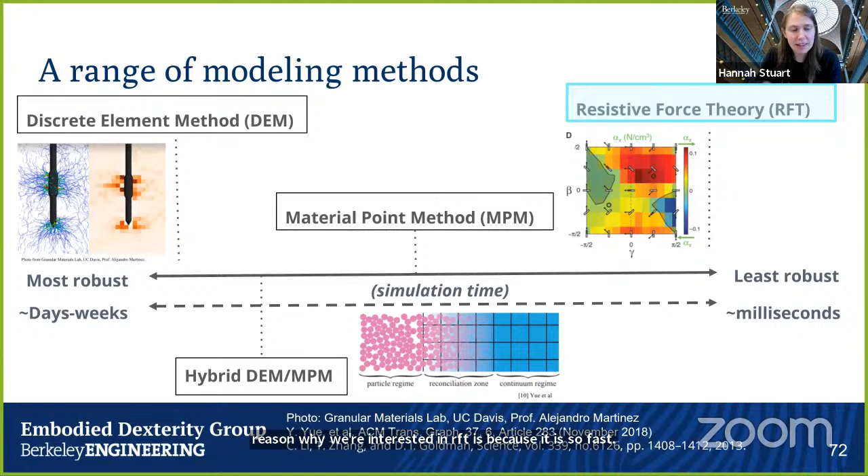And the method we're using for the limit surfaces is to essentially take 3D RFT, apply various wrenches, create this wrench space with associated twists, and then fit some sort of surface to these experimental points. The big question is how representative, or how do we represent the estimated motion given a particular wrench that we may not have actually measured.

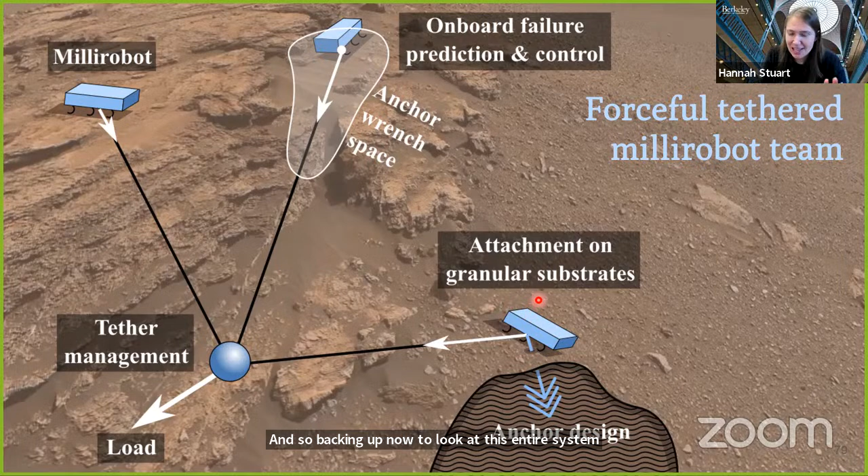So that is how do we model the forces we might expect to get out of the system. Backing up now to look at the entire system, we've talked about this contact point. But one really important contact point I have not brought up, and which generally causes people trouble, is the contact between the tether and the environment. This is really, really important. What I'm showing here is the simplified capstan equation.

As you wrap a string around an object, you get this integration of friction that allows you to exponentially apply more forces to the environment. You can actually see this with flossing - if you just try to squeeze your floss, it's going to slip out of your fingers. But if you wrap it around your finger a couple of times, you're going to crush your finger before that floss comes off. Go ahead and try that tonight while you're flossing.

Often when it comes to planning and controls, these contacts are avoided. They're seen as adversarial because it becomes difficult to model these systems. We're trying to flip it around and say you can also get this exponential increase in your force. So if I increase my holding force from 5 newtons to 10 newtons, I'm doubling it, and when I put it into this exponential equation, I get huge increases in my ability to resist forces from the central payload.

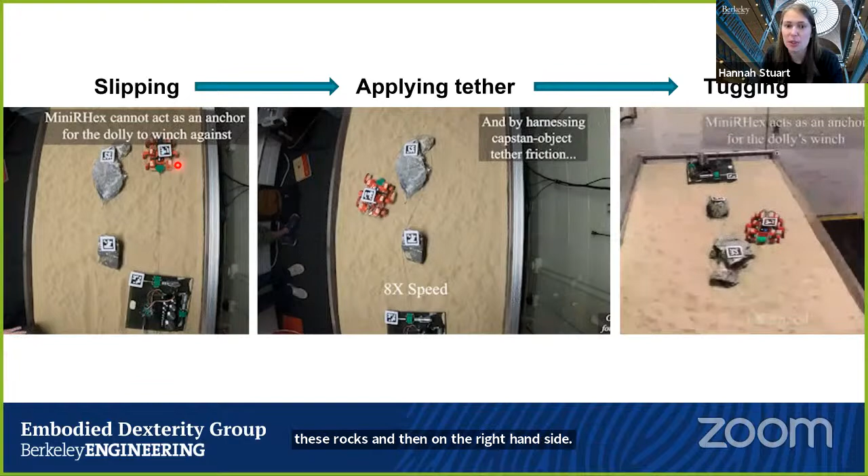You can see this in a simple case here where the robot on the left-hand side is not able to resist the forces. In the middle, it is able to resist those - we're going to wrap our string around these rocks. And on the right-hand side, once the string is deployed, we're able to resist those tugging forces.

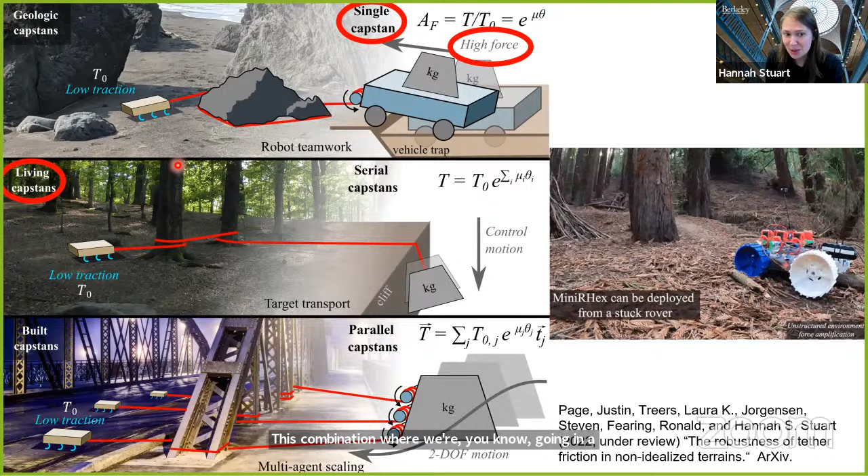There's a number of different configurations or applications one could think of for this. I'm going to show a bit from this combination where we're going in a living environment. Around Berkeley there's a lot of redwood trees, and we're going to use a single capstan with a small robot that's going to jump off the top of our little rover that's stuck.

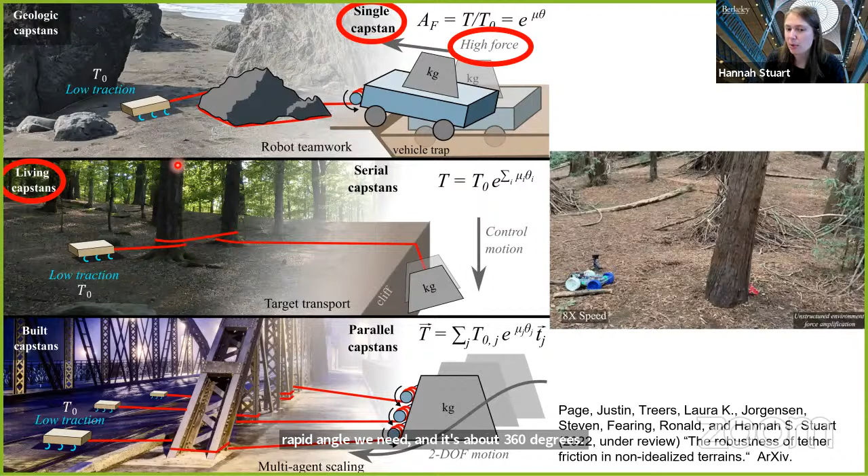And then what we're going to do is have it run out into the environment. Here we're just remote controlling this, so we're not dealing with the planning issue at all. The only exception is that we've calculated how much wrap angle we need, and it's about 360 degrees, so we're going to go just about 360 degrees. We're right at the edge of what we need. Okay, so now we're going to use the winch on the rover and actually winch this rover forward.

You can see that the mini legged robot actually flips over, but despite that, the maneuver is overall successful, and the rover is able to drive forward on its own. If that little rover had just run out, there would have been no chance. It really is that exponential amplification of the capstan that allows this maneuver in any way.

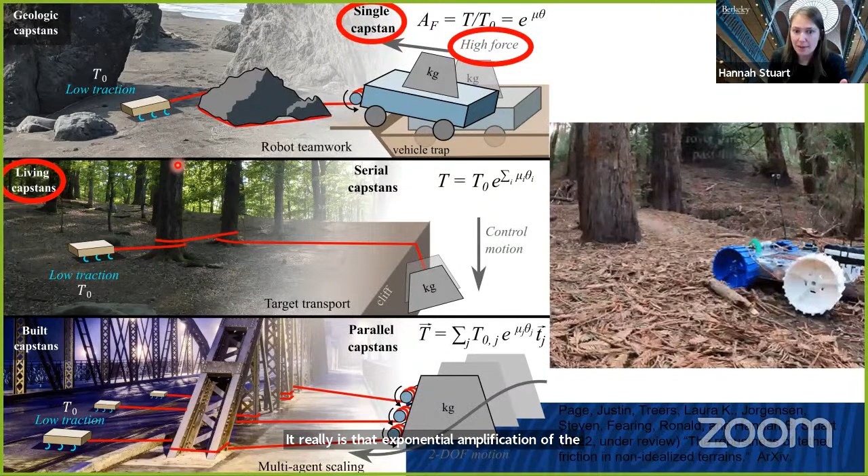So to start thinking about how we might move forward with some framework for controls or planning, we went around and measured how well the capstan equation actually matches the trends we see. Here we wrapped a string around this redwood tree, and we've done this for 10 trees to see how well this exponential actually fits. We find it to be fairly consistently helpful, with these ranges of minimum and maximum expected events. There's always going to be upper outliers because of snagging or tugging between the bark and the string, but the lower bound is fairly consistent. If you're interested in this, it's out now through Robotics and Automation Letters, so go ahead and check it out.

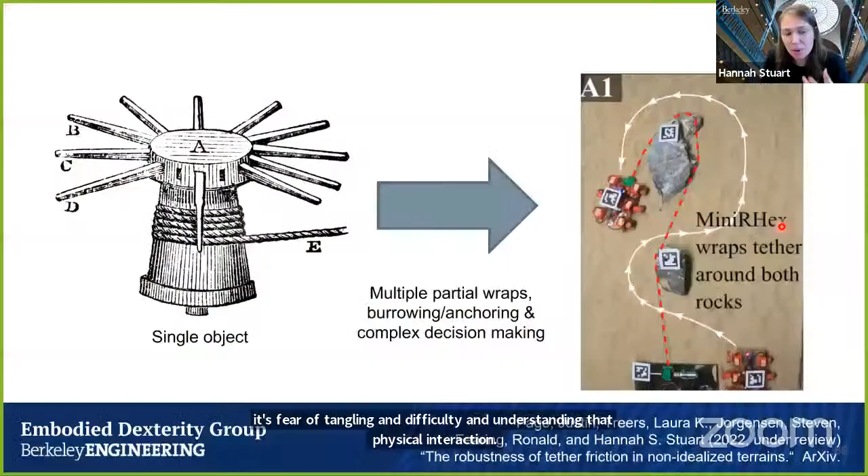Now, throughout this whole thing, you might be thinking, okay, capstans, this is not a new technology. I completely agree. I think there's potential evidence it might have been used by the ancient Egyptians. But there are some really big, important reasons why it's not commonly used in robotics: fear of tangling and difficulty in understanding that physical interaction. I think this is an important area for ongoing work. What we're finding is that in a robotic system, you generally don't want to loop multiple times around one object if you want it to be reversible. So I see us moving towards the utilization of many capstan objects in an interesting mapping.

As we move forward, we're going to be thinking about how this can be applied in multiple robot systems, which you can see on the bottom, allowing for two-dimensional motion.

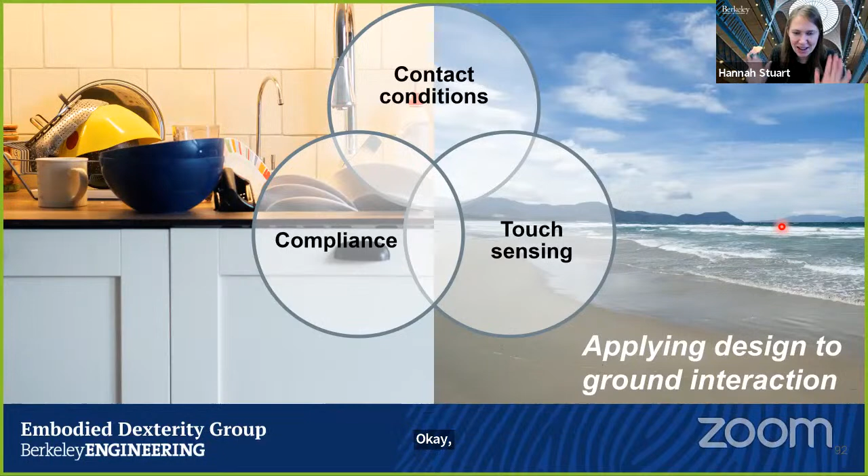Okay, so I think that's all the projects I have for you today. Really what I want you to take away from this talk is that the technologies you saw here were none of them particularly expensive or complicated, or they're fairly easy to make. In some cases, literally just a string. But you can change how you're physically interacting with the world through changing your friction, essentially, changing your contact conditions. So hopefully I've convinced you that not everything needs to be solved in planning or controls. I think there's really an important role for systems design in these kinds of problems.

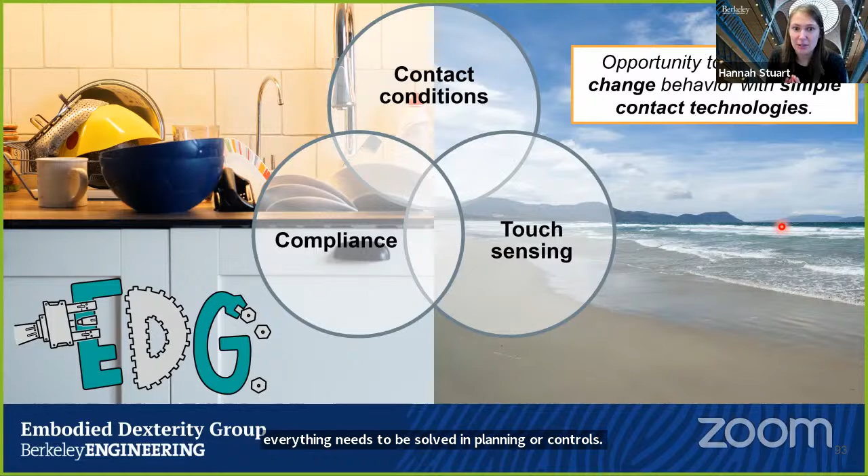So today I showed a good subset of our line of work. I do want to point out for anybody interested that we have a newer line of work in human assistance and human grasping. Most of these are conference papers and maybe a journal or two under review now. This kind of ramped up during the pandemic, so it's a little delayed, but we're doing some really cool stuff, really thinking about how we harness the physical abilities of the person and then augment them with interesting design properties. Broadly, we're really thinking about how we understand the body power of the person we're working with in order to come up with creative new systems that augment that person without getting in their way. So keep your eyes out.

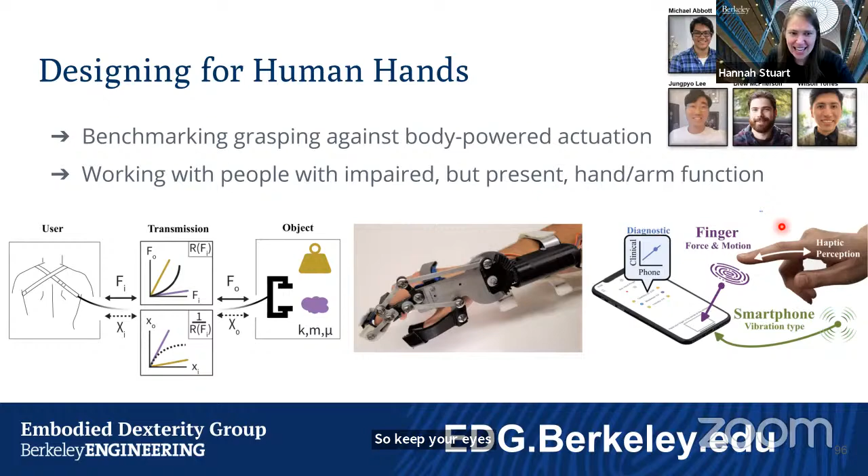But with that, I will go ahead and stop for any questions.

All right, that was perfect. That was an exceptional talk. I myself felt inspired, and a talk is good when there are private messages being sent around saying this talk is amazing. So maybe I can open the floor for questions from Zoom or from YouTube. Who wants to go first?

Anyone? I'll go first. Hannah, really, really awesome, really interesting and inspiring work. I love the way that you talked about so many projects, but tied them together in such a meaningful way. This whistle sensor is so fun and creative.

I was wondering if it's possible—I know the frequency is probably set by the length of the cavity—but is it possible to design it with an ultrasonic frequency so it's not audible?

Yeah, so we've been trying. That would be awesome, I think everybody in lab would appreciate that because they need to test at night since it's making sounds. So we've started to explore—I think it gets smaller and smaller, which is also nice as a tactile sensor because it could have more spatial resolution. We're kind of moving away from one long whistle in a structure to an array of smaller ones. We got close, but there was always one or two people in lab, maybe with healthy young ears, who could hear it. So we'll see, but it's definitely a goal.